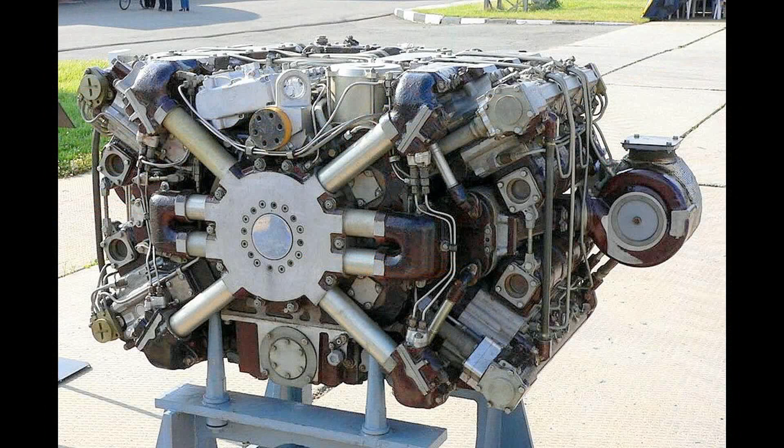It's obvious that the reason why the US Army wants an unmanned turret and an automatic loader now is only because the Russians are doing it and have upstaged the US Army in the press as a result. Yet nothing but the sound of crickets from the Army regarding the fact that the T-14 Armata is powered by a diesel X12 engine instead of a gas turbine. But I digress. The accidental implication of which is that the US government should adopt communism so that we can compete more effectively.

You may recall from another series of presentations I have created, Failed Tanks, that episode 35 featured a vehicle known as the Future Main Battle Tank, or FMBT for short. The FMBT was designed by Asher Sharoni and Leonard Bacon, whom you will remember from previous presentations, of the Western Design Corporation. It boasted an unmanned turret and automatic loader, and the US Army Armor School's official publication, Armor Magazine, featured concept art of the design on the cover of their July through August 1993 issue.

It goes without saying that the Army was clearly publicizing the FMBT as a feeler to gauge the reaction to the notion of a tank with an autoloader and unmanned turret, a concept they had been wringing their hands over for some time by then.

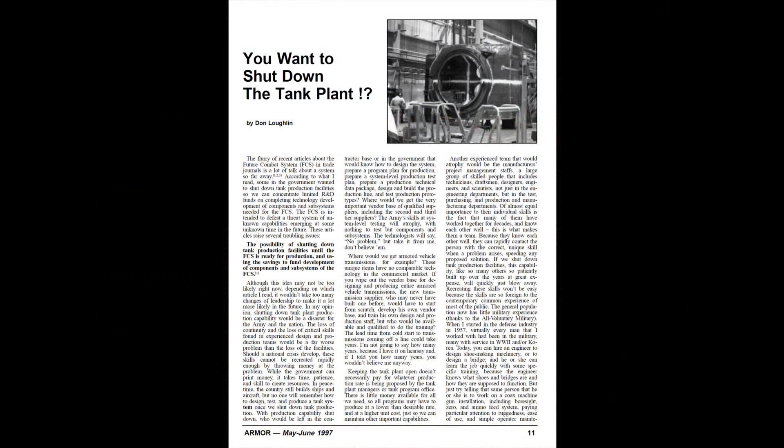That said, it was noted in the replies to Armor magazine's tank design contest results that due to the limited pivot of the autoloader and the low design of the FMBT, it had less gun elevation than most other Western tanks, and so little gun depression, that it was practically unusable on all but the flattest terrain.

Removing the crew from the turret inevitably bred the compulsion to remove armor from the turret, as the crew are no longer inside of it, making the structure on tanks that is most likely to be hit by enemy fire more vulnerable to penetration. Removing the crew from the turret also eliminated unrestricted top vision, as it was no longer possible for the TC to stand up through a cupola on the roof and survey the battlefield with his own eyes.

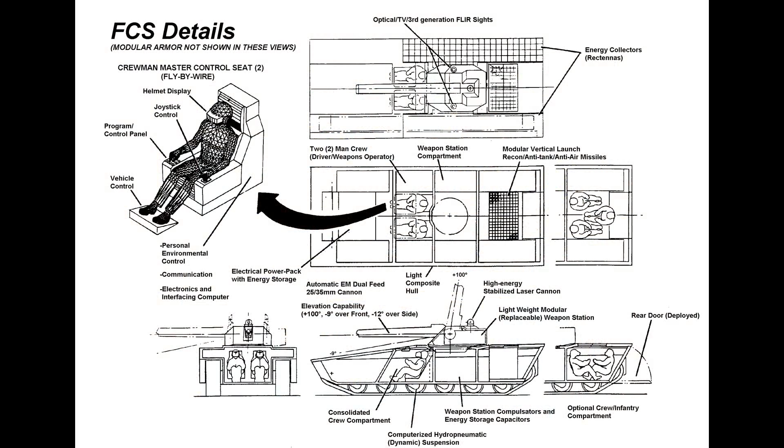The FMBT was instead to use a variety of sensor windows and camera arrays, which are vulnerable to being obscured by mud, dust, ash, and a wide range of other detritus typical of a battlefield. To say nothing of these cameras and sensors easily being damaged or destroyed by small arms fire, shell fragmentation, shrapnel, falling debris, and many similar hazards that can be expected to pepper tanks that are exchanging fire with the enemy.

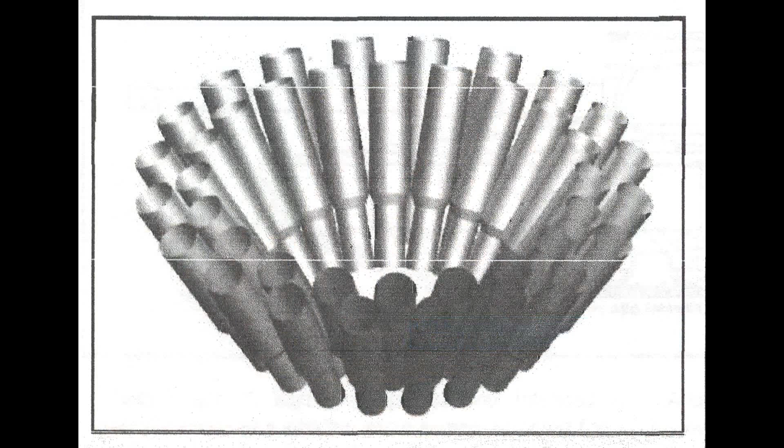The main gun ammunition was moved into a rotating carousel in the hull, in the same configuration as the Soviet-made T-72, which, as you may recall, exploded so violently when penetrated, as a direct consequence of this configuration, that their 25-ton turrets were yeeted 40 feet into the air. As the carousel also sat directly atop the belly plate, a shaped charge anti-tank mine could be expected to detonate the FMBT like a giant pipe bomb, and the same for a direct hit on the turret by a top attack munition.

Another fatal error of the FMBT's design was that, by removing the fighting compartment from the turret and its basket, the only place for the crew was sitting abreast in the front of the vehicle. Not only does this place the crew in the most likely part of the hull to be penetrated by casualty-type anti-tank mines, but a HEAT or sabot penetration through the side of the forward hull will bifurcate the entire crew.

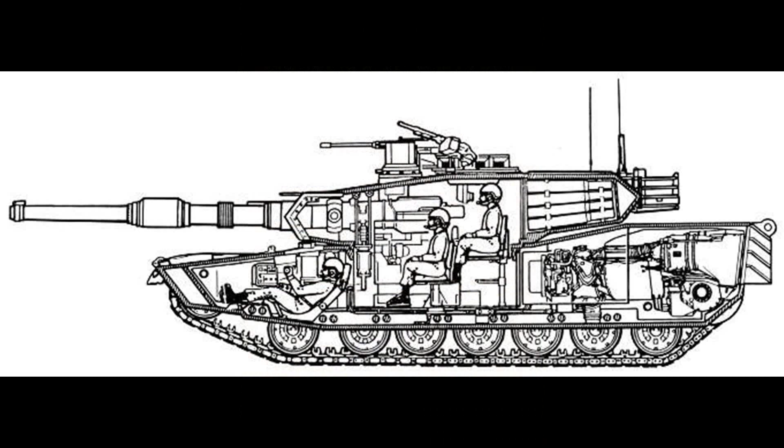As you can see in cutaway views of the M1, its turret basket alone is too cramped to accommodate the crew, and it goes without saying that personnel will not be expected to inhabit its blast furnace-like engine compartment. That makes it too obvious that an M1 with an unmanned turret will inevitably have 2 or 3 crew members sitting in the front of the hull, exactly where they would have been inside the FMBT. Also exactly where the crew are placed inside the T-14 Armata, which the Pentagon and their mouthpieces low-key worship, and are now portraying as a dire threat in an attempt to keep their budget fat and happy.

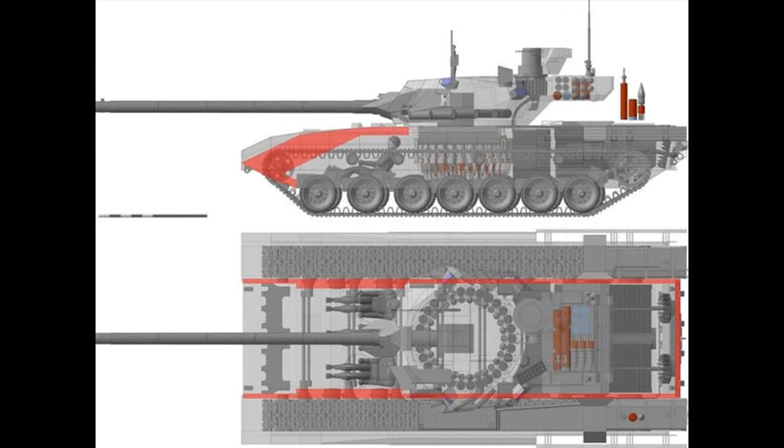Yet another issue that no one in the US defense industry or military seems to have the moral courage to address is the fact that with a crew buried deep into the front of the hull, the interior of the turret will only be accessible by exiting the vehicle. From there, a crewman exiting the vehicle must climb onto the roof and open a hatch, continuously exposed along the way to all of the threats that are the reason the M1 Abrams encases its crew in armor. If any of the weapons malfunction, a fire starts inside the turret that the suppression system can't handle, the machine gun must be reloaded with a new belt, or the autoloader or the replenisher breaks down, this is exactly what one of the crewmen must do.

It's either that, or return to base, and if the vehicle does so in the middle of a battle, it has thus suffered what military terminology refers to as a firepower kill.

The obvious solution to these problems is to remove the autoloader and replenisher middleman entirely, move everyone but the driver out of the driver's compartment and into the turret, thicken the turret armor, load the weapons manually, add a cupola to the roof to restore top vision, and get rid of all the cameras that the cupola has rendered

completely redundant. But then you'll just have a regular tank again, and the sales and ongoing technical support for a simple and reliable weapon aren't as profitable to the defense industry as a gold-plated Rube Goldberg machine that's always stuck in maintenance.

The selling point of the low-profile turret was in part that being unmanned helped keep the expeditionary tank's height low, but it ended up being significantly taller than the other 2 finalists. The 2 other finalists in question were the Cadillac Gage Commando Stingray and the FMC CCVL, which both had manned turrets.

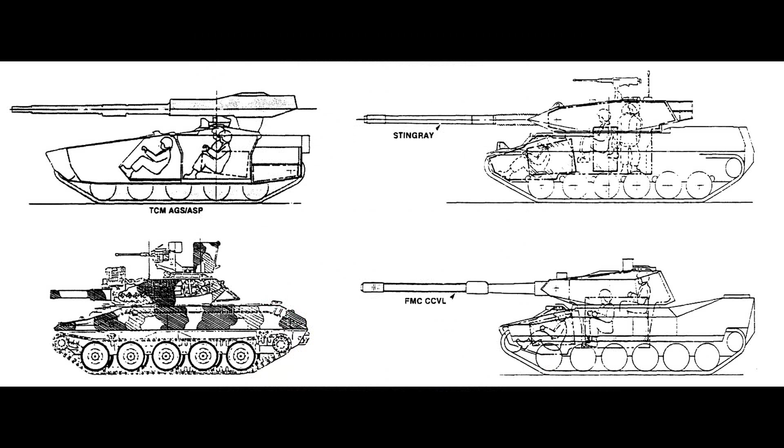The expeditionary tank also had a lot of trouble cycling ammunition and suffered frequent autoloader and replenisher malfunctions, an imbroglio which replayed itself all over again during the development of the Stryker MGS. Clearing these stoppages, of course, required someone to climb up atop the hull and then enter the turret from above, as the crew compartment far forward in the hull made it inaccessible from below. Why does that sound familiar?

This was not an issue with the CCVL, whose turret was manned. The autoloader and replenisher were both easily cycled manually by the crew simply by flipping open the top access cover. Crew injury while manually cycling the autoloader was effectively impossible, as simply opening the access cover also disconnected the mechanisms that operated it.

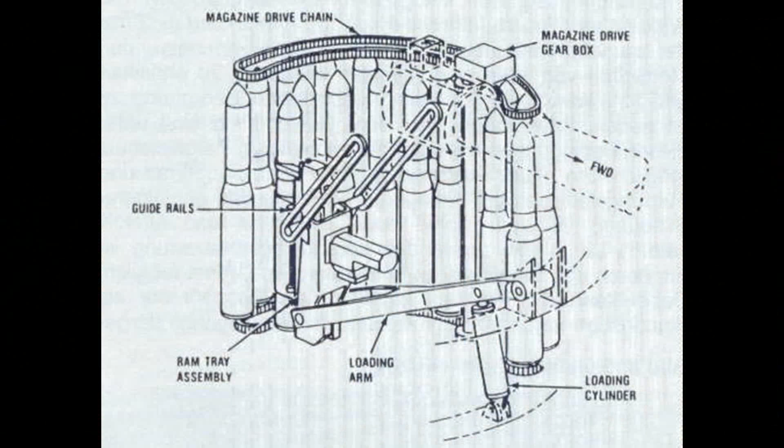Not that it was ever necessary, because the CCVL's autoloader was lifted right out of the proven 5-inch Mark 45 turret that had been used by the US Navy for decades by this time, and was so reliable that despite cycling thousands of rounds throughout development and testing, the CCVL's autoloader and replenisher never suffered a single malfunction. The Commando Stingray never suffered a single autoloader or replenisher malfunction either, because it never had them. Its manned turret included a human loader.

The excessive height of the expeditionary tank was the final straw for the Army, and it was the first of the 3 finalists to be eliminated, as a taller vehicle is a more dangerous payload to airdrop from a C-130 Hercules. The Commando Stingray was also only narrowly rejected by the US Army, but Thailand ended up buying 106 of them, which are still in service to this day.

The CCVL was declared the winner, and was type classified as the XM8, later as the M8 Buford. Meanwhile, despite a long and desperate marketing effort by Teledyne, they never sold any expeditionary tanks, and marketing for it ceased in the late 1990s.

The unmanned low-profile turret was later offered on a wide range of other vehicle hulls, including those from the M41, M60 Patton, Centurion, Challenger, and LAV-1, but not a single military in all the world was stupid enough to buy it. Not a single military, except the US Army, who bought it as a component of the M1128 Stryker mobile gun system. How quickly they unlearned their own recent history.

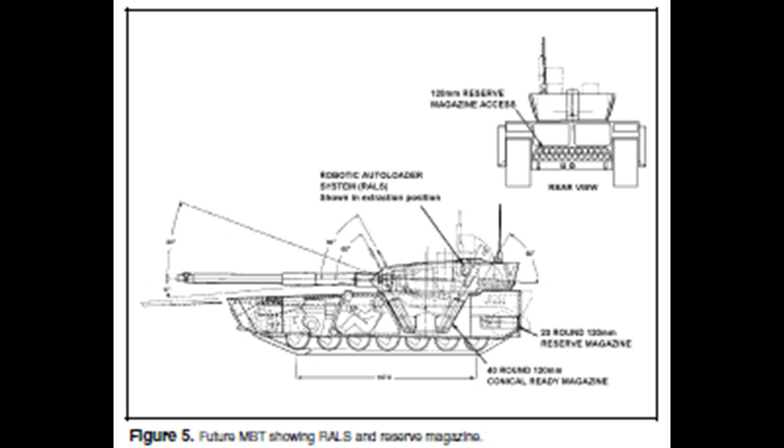A tank crew is a team and every man is essential to the success of a mission. Automation of the main gun will not reduce the workload of a tank crew or platoon. What an autoloader will do is take up precious space, require maintenance, and almost certainly reduce the number of troops available to accomplish the mission. Sharoney and Bacon state that the 3 versus 4 man crew is a doctrinal issue and should not be driven by engineering considerations. Having said that, they move right on to bend doctrine to fit an autoloader design. Here are some doctrinal issues from a line unit. 1. Keep it simple. 2. Tank crews cannot afford to be any smaller. There is too much soldiering to be done.

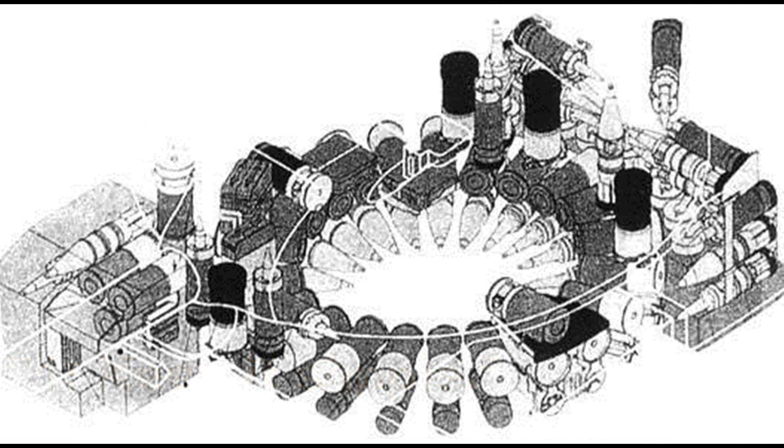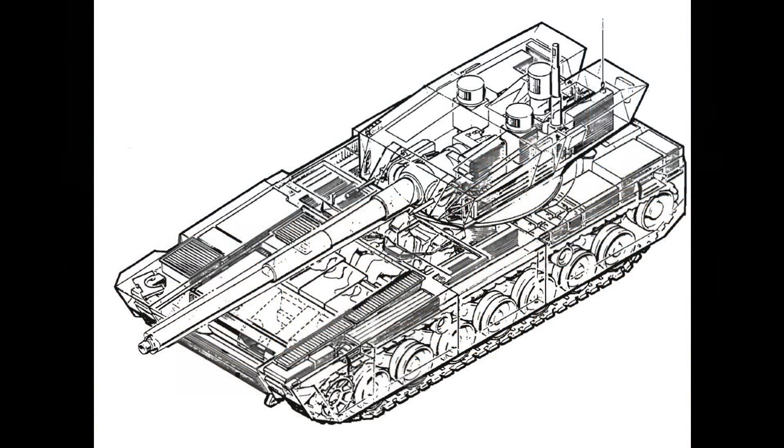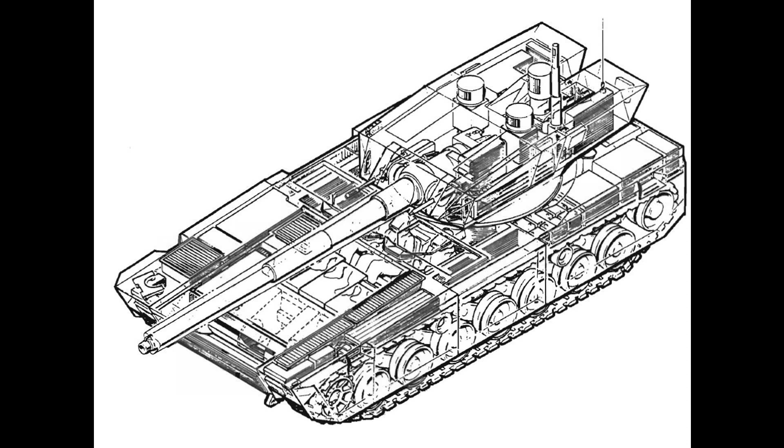3. Tank designs that sport unmanned turrets are no-go. The tanker's greatest asset is his commanding first-person view of the battlefield. The crew needs to be up in the turret, oriented with the weapons. Fighting a tank from the hull like a mole may increase survivability, but strips the crew of its natural situational awareness and ability to fight the tank. WDC decrees that automatic loading systems will become standard. Crew member duties will be readjusted to address other battlefield management and technological needs. Wow, sounds great. Perhaps they can explain how to readjust the tasks required to prepare a defensive position. I'll be all for an autoloader when it can replace the M8 chemical alarm.

In short, the Army has known for a long time that the changes they are now planning for the M1 Abrams are cursed. Given that the M1A3 changes far too much and weighs far too little, it is likely the final nail in the coffin for the development of the M1 Abrams. If that sounds far-fetched to you, then know that this outcome has become a trend in the US Army. Recall from the 2021 Bradley update that the Army themselves have publicly stated that the failure and termination of the A5 Bradley program prompted them to cease all further development on the Bradley fighting vehicle. However, the M1A3 isn't the only new tank program the US Army is currently pursuing. And no, I'm not talking about the Griffin 3, although I might have to address that topic in another presentation in the future.

Though before we jump into that, I'd like to note that there might be a lot of overlap between the first and second segments of this video, as they both involve numerous poor tank design decisions that are common to both topics. As such, many of the sources in the video description for this topic also apply to the next one. This is going to be another long one, so we'd better get started now.

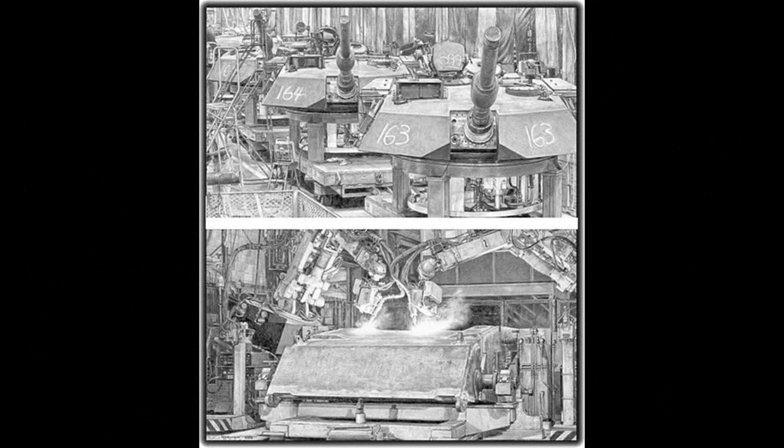The prerequisite talents, knowledge, and skills for developing a new armored fighting vehicle are perishable, and the Army hasn't developed a genuinely original main battle tank design for more than 40 years. If you look at the concept sketches that have been published by, or leaked from the Army, and by leaked, I mean planted, it's clear that they are just rehashing old ideas. And worse still, they're all only ideas that never worked, and self-evidently never will.

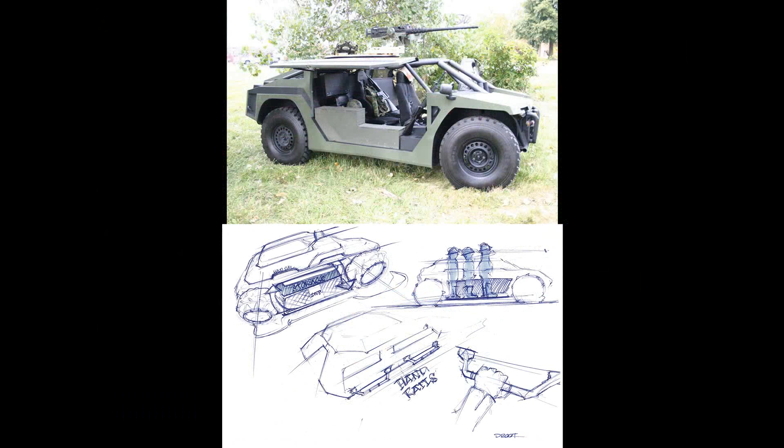How many committees did these sketches go through that failed to notice that their tanks of the future are all armored cars of the past? No new ideas. No future. This also isn't the first time the Army has succumbed to the siren song of wheeled armor, as the disastrous Kevlar coffin has shown us, and the idea of replacing tracked armor with trucks is presented unironically, as though it isn't a proposal to emulate Belgium. Canada nearly fell into the same trap as well in the early 2000s, which we've already seen.

The prospects for the M1 Abrams replacement effort are dark indeed, because the aforementioned issues not only prove it to be irreparably doomed by the simple fact that no one the Army involves themselves with either knows or cares what a tank is supposed to be, but more likely than not, they won't even be able to build it at all.

Colonel John Boyd once commented of several doomed US Air Force programs that they are out of airspeed, altitude, and ideas. Although the saying is a reference to aviation, it still otherwise perfectly fits the Army's latest crisis of competence. There is one certainty, however, given past US Army tank design trends: the next tank will be significantly heavier than

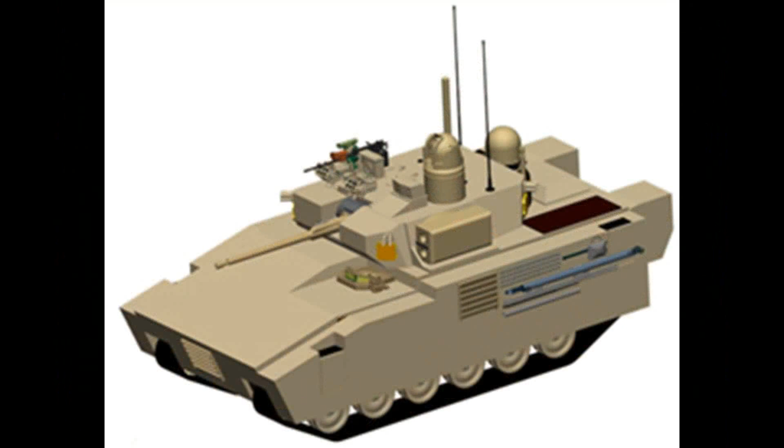Given that the last couple of M1 Abrams variants have grown in leaps and bounds to 85 tons, the latest variant of the originally 25-ton Bradley fighting vehicle now weighs 50 tons, and that the GCV intended until recently to replace the Bradley was to weigh 85 tons, it isn't much of a stretch to assume the replacement for the M1 Abrams will weigh at least 90 tons, if not more than 100 tons.

The Army will of course defend this indefensible decision, as they make preparations to field the spiritual successor to Germany's Maus tank. This of course sounds ridiculous, but would any of you have predicted 15 years ago that the Army would present to the world an 85-ton main battle tank with a straight face? This is what psychologists refer to as the ratchet effect, and when combined with incestuous amplification, the Dunning-Kruger syndrome, and placed inside of an echo chamber, the results tend to be tragicomic. Like, for example, the 85-ton main battle tank the Army is now fielding.

A related article on military.com titled "Army Studying Whether M1 Tank Replacement Should Be Driver Optional" reads like a cautionary tale of why you can't trust the system. For instance, let's just recite the title of that article once more. Army Studying Whether M1 Tank Replacement Should Be Driver Optional.

We already know better from the disastrous combat results of Russia's Uran-9 unmanned ground vehicle in Syria than to ever again rely on a computer to control and navigate an armored fighting vehicle. Yet more than a year after the uproar in the international press over that imbroglio, we still see the Army trying to crawl into that roach motel. This is only just the title of the article.

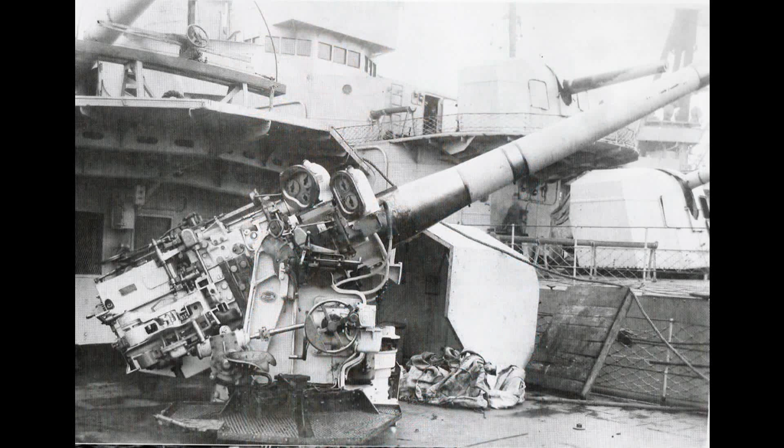120mm rounds are also much heavier than 105mm rounds as well, placing greater strain on both human and mechanical loaders, leading to more rapid fatigue for human loaders, and more rapid wear for autoloaders. 120mm ammunition is also already approaching the practical limit for what a human can seriously be expected to lift, as the French Navy learned the hard way with the 130mm and 138mm guns on their interwar era destroyers.

The Army's mad dash to regun the M1 Abrams with a 120mm gun also proved pointless, as the successful use of 105mm guns against T-72s in Lebanon during the 1980s, then Kuwait, Iraq, and Yemen in the 1990s has proven. In fact, after the 1982 Lebanon War, captured Israeli 105mm APFSDS ammunition was given to the Soviet Union for testing and evaluation, and gave the Russians some nasty surprises.

Dubbed the M111 Hetz, the Soviet army fired this APFSDS round from a captured Magach 4 main battle tank at the latest T-72B1 variant at the Kubinka Proving Grounds later in 1982, and they were horrified to discover that it went right through the strongest armor. The M111 Hetz was also grossly inferior in armor penetration to the US Army's 105mm M900 APFSDS round fielded in 1989. A fact the system rug swept to protect the continuing acquisition and use of the M256.

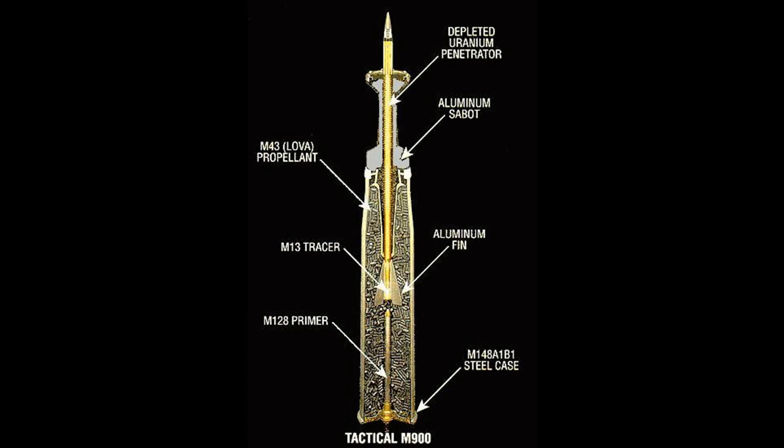Despite this, and despite tank armor evolution having effectively peaked in the early 1980s, the Army is still seriously entertaining the possibility of the M1 successor having a 140mm gun, a proposal akin to selecting a sledgehammer to swat a fly. Not only would a gun this large present crippling problems with ammunition handling, recoil, and a substantially greater muzzle blast danger zone for surrounding personnel when firing the gun, but it also means far less ammunition can be carried.

Ammo stowage would be reduced down to at most 30 rounds, and an extremely long ammunition compartment would be required, given that the shell casing alone for the 140mm round is a whopping 1 meter long, and the number of rounds a field supply train with a fixed storage volume can transport will be cut in half once more. That also means that the field supply trains already dangerously overworked with the maintenance and refueling of M1s will also have to bring them ammunition more often as well.

Carrying less ammunition than your enemies is a quick way to shoot yourself in the foot, as the Arabs learned the hard way. The following is noted on page 38 of the book M60 vs T-62, Cold War Combatants 1956 through 92 by Lon Nordeen and David Isby.

The amount of gun rounds inside the Patton M60A1, M60, M48, and the Centurion tanks is remarkably higher, about 60 rounds in each, than in the T-62 and T-55 tanks, less than 40 rounds. The meaning is that on average the T-62 and T-55 tanks should leave their active fight and firing positions for refilling of gun ammunition more often than the other tanks, which means that on average the percentage of effective tanks in each moment is smaller in T-62 and T-55 units than in the units of the other tank types.

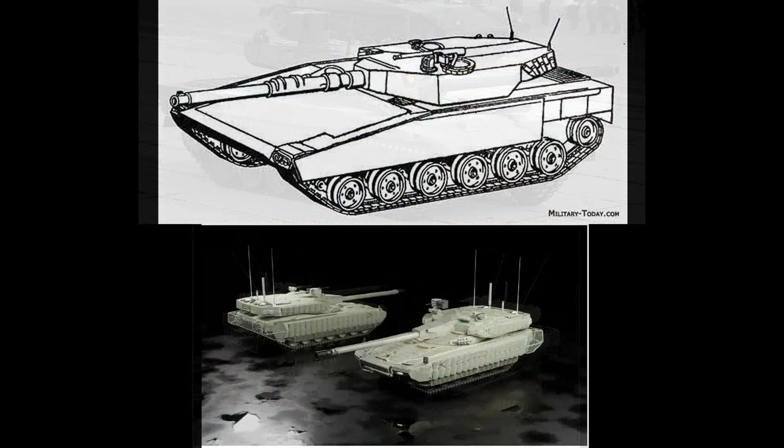The three finalists of the OMT program have also outed how much of an imagination wasteland the Army has become, as version 1 is a clone of the T-14 Armata, version 2 is an NKPZ suffering from a terminal case of gigantism, and version 3 is a Star Trek transporter beam accident that merged a Leclerc with a GCV. Moreover, the Army would much prefer you didn't know that all of these new ideas are not only old, but also thoroughly discredited by their own past publications.

For example, recall the FMBT described earlier in this video, and the armor community's backlash against it. Moreover, recall that the FMBT was designed by Asher Sharoni and Leonard Bacon of Western Design Howden, a company previously named the Western Design Company, or WDC. If you look up Western Design Company today on the internet, you will see that all they've ever manufactured were spare parts, which needless to say, is a huge red flag on the part of their resident celebrity tank designers.

That said, the remaining segments of this presentation are all basically random topics that I've never covered in detail before, but at the same time, aren't significant enough to warrant their own chapters of the real M1 Abrams. A few of these were originally destined for another fun M1 Abrams facts video which ultimately never went into production. Also, speaking of things that were never produced.

One of the most widespread disagreements between most publications on the M1 Abrams concerns the number that were produced, and it seems that, if you look at any three of them, all three will present a different number from one another. Wikipedia claims some 10,396 were built, while FAS, the Federation of American Scientists, claims some 8,800 were built. Tanks Encyclopedia claims 9,000 were built. Deagel, or however you're supposed to pronounce it, claims 10,646 were built, and I recall that at least one source claimed 12,000 were built.

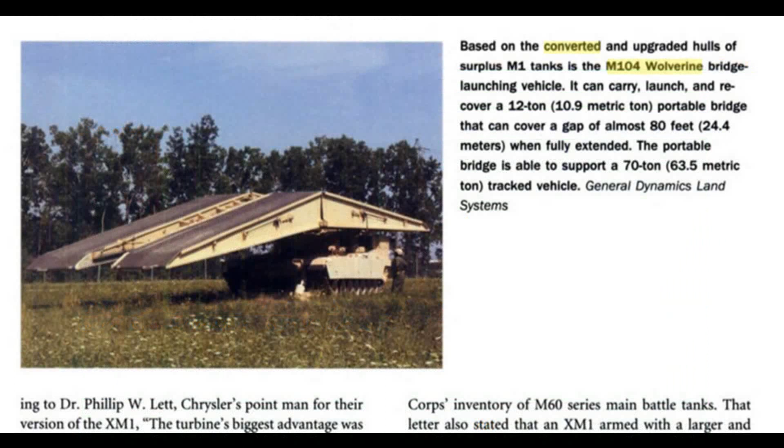If one reads the published documentation associated with these M1 variants, such as the M1A2 SEP, the M104 Wolverine, and the M1 ABV, it is noted that not a single one of these vehicles is a new built chassis. Rather, every single one of them was a rebuild of an existing older hull taken out of storage. That, of course, raises 2 obvious questions. What M1 hulls were all of the post-2000 M1 Abrams variants converted from, and how old are they?

It might seem pointless to count the number of M1 Abrams tanks in existence, but doing so brings to the surface an unpleasant fact about the M1 FOV that the Pentagon was hoping no one would notice. Namely, how old and badly worn out all of the supposedly new SEP series M1A2s are. As noted by Army Guide, the final M1A1 rolled off the assembly line in 1993, by which time M1A2 production had begun, and we have already established that all post-1990s M1 Abrams variants are rebuilds of older tanks.

In short, we can confirm that every single supposedly new tank delivered to the US military after the aforementioned 77 M1A2s were converted from vehicles built during or before 1993. That is, the fabulous new M1A2 SEP introduced in the early 2000s began their service lives at the ripe old age of 10 years old or more. But just how old? This is where the number of each previous M1 variant built, and when they were built, comes into play.

First, let's consider the M1A1, as it was the most numerous M1 version built, and because new built vehicles were produced for only two nations, the US and Egypt. According to the IISS publication titled Military Balance 2017, the Egyptian army owns 1,360 M1A1s, the last 360 of which were later imported from the US after year 2000. The Task and Purpose article we saw before noted that at the time it was written, there were 5,200 M1A1s in the US inventory, including some 3,000 that were in disuse.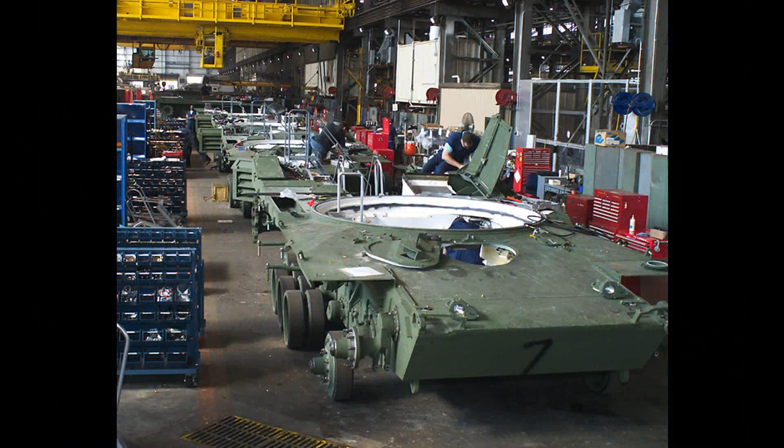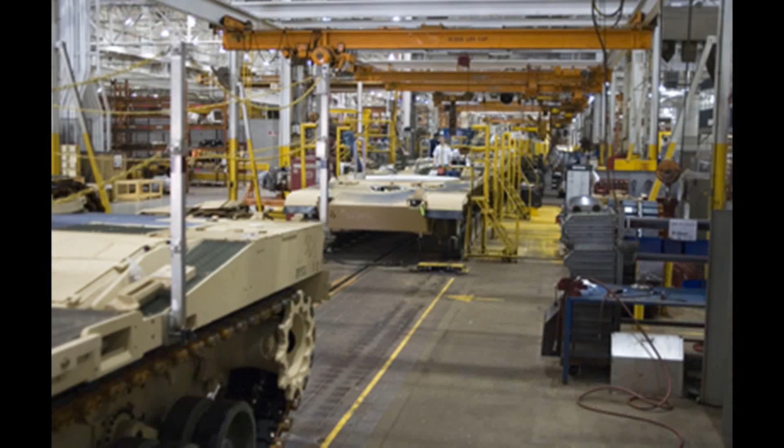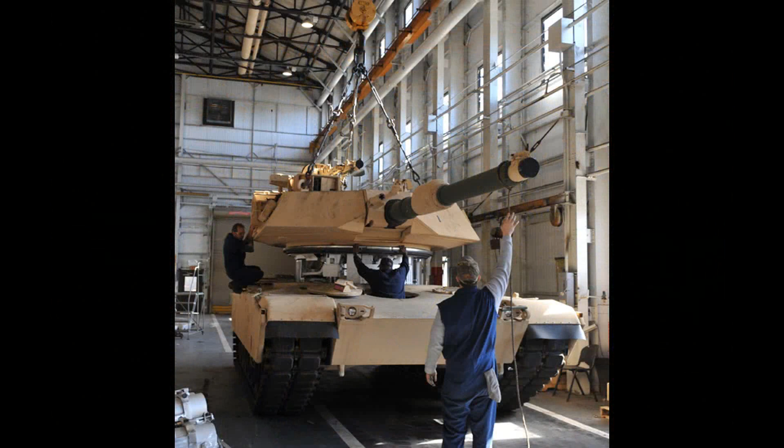Moreover, there's yet another dirty little secret concerning the production of the M1 Abrams. Not only did no new build production of the M1 Abrams FOV take place since the mid-1990s, but no new ones can ever be built either, even if the US government or GDLS wanted them. As noted in the 2021 update on the Bradley fighting vehicle, when production of war materials is finally terminated in the US, all factory equipment required to produce the complete weapon system in question is destroyed, in compliance with US law and international arms proliferation treaties. Only a fraction of the assembly line can legally be preserved, and then only for the purpose of refurbishing existing weapons, or producing certain specific parts for them.

The Detroit Arsenal tank plant in Warren, Michigan, that manufactured all of the M1 Abrams hulls was closed in 1996, and all manufacturing efforts were moved to the Lima Army tank plant located in Lima, Ohio. However, as noted by the press releases, the Lima Army tank plant was only outfitted to build spare parts for tanks, not new hulls or turrets.

That also puts into the proper perspective the hype in the early 2000s over the US Army supposedly not wanting any new tanks, GDLS supposedly still having the ability to build new M1A2s, and this supposedly being critical to the national interest. Given what we've previously established, this supposed crisis is obviously just the military-industrial congressional complex playing good cop bad cop as usual, to divert attention away from the fact that no more M1s can ever be built. Such are the extremes to which the system lies to us, in order to protect their precious nest eggs. They are so dishonest about how many M1s exist, and how old they are, that one has to pick through dozens of different publications to find the correct figures.

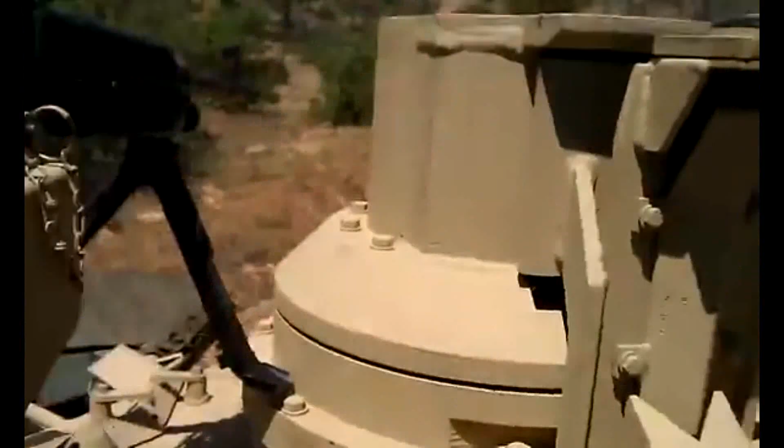However, it's not just the numbers they're hoping won't be noticed about the M1A2 SEP. It turns out there are some showstoppers involving the M1A2 SEP that somehow escaped my attention, which I discovered when browsing DOT&E's annual report from year 2000. For example, firing the M1A2 SEP's main gun while using thermal imaging causes a washout effect in the display for several seconds, during which the TC and gunner are blind. So much for the supposed speed of the M1A2's vaunted hunter-killer capability. The report claims the washout effect was finally fixed in year 2000. It's a good thing there wasn't a war between then and 1992, when the M1A2 first entered service.

Another issue is that the UAPU, the much advertised Under Armor auxiliary power unit of the M1A2 SEP, didn't work, and as such, it was never installed. Instead of a lengthy elaboration, I'll just read to you what DOT&E reported on the matter in their own words.

The development of the Under Armor Auxiliary Power Unit, UAPU, has proven to be a significant program challenge.

The UAPU is intended to provide auxiliary electrical and hydraulic power to the system during the conduct of mounted surveillance, thus reducing engine usage during tactical operations while improving operational fuel consumption rates. Engineering design problems encountered during developmental testing with the UAPU have led the program to delete the UAPU from the M1A2 SEP production configuration. The UAPU remains an important system requirement, however the program is not currently funded to continue UAPU development and the UAPU is not currently included in the production configuration of the system.

You will recall from earlier that ultimately, the UAPU ended up replacing one of the 4 fuel cells in the M1A2 SEP, only to be removed later. Yet the removed fuel cells were never reinstalled, and were instead replaced by an over-glorified car battery.

Another example of how badly the Army botched the M1A2's development is that it inexplicably acquired a problem with uncommanded gun movements that no prior M1s had an issue with. Somehow previously overlooking this astonishing failure, I had to shoehorn in this topic at the last minute while creating this video because it's too damn funny to leave on the cutting room floor. The M1A2's tendency to suddenly move its gun without warning plagued it for years, setting back its service entry for half a decade. I'll just let the DOT&E document's own text speak for itself.

As opposed to today's standard of journalism, which is simply to copy-paste statements made by the Pentagon or the defense industry. It was within this era that a watchdog group called the Project on Military Procurement reported both heavily and honestly on the M1 Abrams, much to the frustration of the Pentagon. The Project on Military Procurement later merged with several other watchdog organizations concerned with government accountability to form the organization since known as the Project on Government Oversight, or POGO. The relevance of that history is that one of POGO's first reports on Pentagon misconduct was a groundbreaking 1990 article on the M1 Abrams, titled, "The Army's M1 Tank, Has It Lived Up to Expectations?"

This article is not only one of my primary sources on much of what went wrong with the M1 Abrams program, but it really stuck in the Army's craw because its sources were almost entirely Pentagon, government, and defense industry publications. In other words, it wasn't POGO's word against the Army's word, but the Army's word against the Army's word. For example, one of the most important, and yet most overlooked, paragraphs in this 1990 article was a quote from a US Army document titled FM-100-5 Operations.

FM-100-5 isn't just any US Army publication. At that time, it was effectively the constitution of US Army policy during wartime, as it set the agenda from which all other Army warfighting policy stems. Along with an accompanying document, titled FM-100-1, The Army, this and FM-100-5 are considered the capstones of all Army manuals. The first edition of FM-100-5 was published in October 1939, and it went through more than a dozen iterations before it was superseded in 2001 by FM-3-0 Operations, but the edition introduced in May of 1986, which was current at the time POGO quoted it, was one of the most important of all of these documents, as this one introduced the doctrine of AirLand Battle.

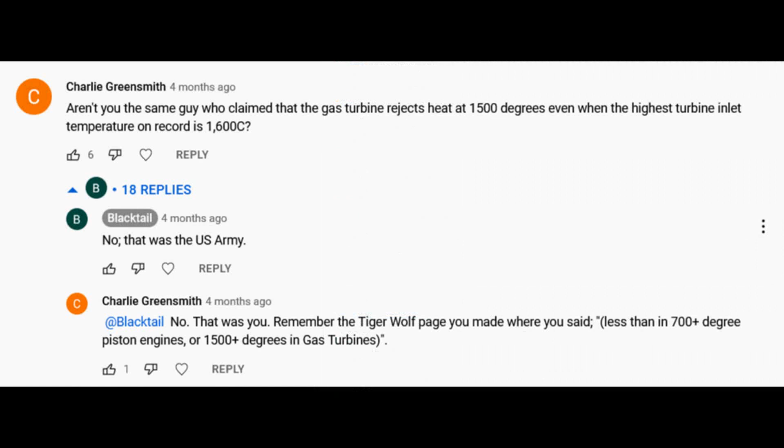This reveals 2 failures of forethought on the part of wherever this argument came from. First, the exhaust from the AGT 1500 is 1700 degrees Fahrenheit, while the highest turbine inlet temperature was 1600 degrees Celsius. In other words, the MHI turbine had an inlet temperature of 2912 degrees Fahrenheit. The most astonishing failure of the detractors' arguments is that they cited the inlet temperature, given that it's obvious that the hottest temperatures from a gas turbine are from their exhaust manifolds, and not the air inlet on the beginning of the combustion cycle, which is at the opposite end of the engine.

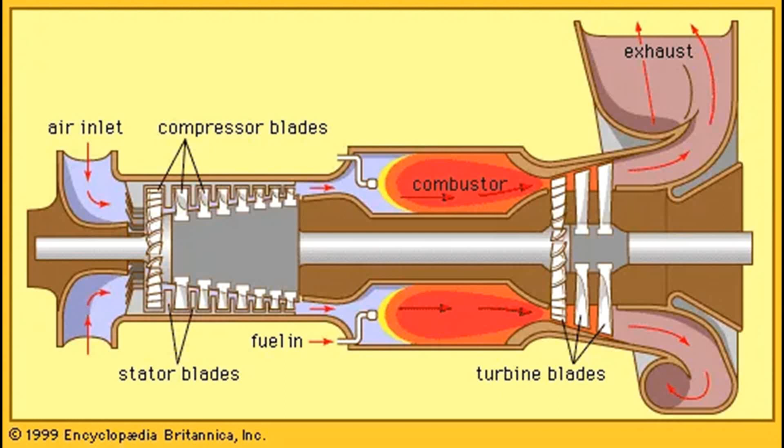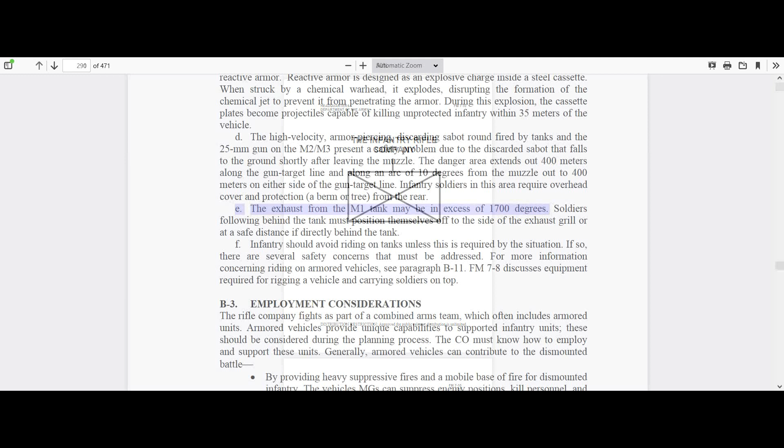Most hilarious, however, is that none of them would admit they were wrong, no matter how many authoritative sources I cited. The detractors' narrative is in conflict with the US Army's own documentation, as the 1992 edition of Field Manual FM 7-10, the Infantry Rifle Company, noted that the temperature of the exhaust from the M1 Abrams is in excess of 1700 degrees Fahrenheit, and warns personnel against following closely lest they suffer serious burns. That this entire segment was still included in the 2000 edition of FM 7-10 gives further credence to the M1's exhaust being 1700 degrees Fahrenheit, especially given that this statement remained uncorrected for more than 15 years.

However, subsequent US Army field manuals have had this mission critical information dummied out of them. For example, the 2006 edition of FM 7-10 put a gag on the temperature of the exhaust, and it now states the following. M1 series tanks have an extremely hot exhaust plume that exits from the rear of the tank and angles downward. This exhaust is hot enough to burn skin and clothing. No mention was made of just how hot the exhaust was, and the exhaust deflectors referenced in the 2006 edition had been standard equipment in all M1s since before the 1992 edition of FM 7-10. The FM 7-10 manual was superseded in 2017 by ATP 3-21.20, which not only fails to mention the M1's exhaust temperature, but also never even mentions the M1 Abrams at all.

You heard that correctly. The Army's primary field manual for infantry operations makes no mention of the Army's primary weapons system, which consumes more of their maintenance budget annually than all other systems combined. As of summer 2022, the 2017 edition of ATP 3-21.20 is still current.

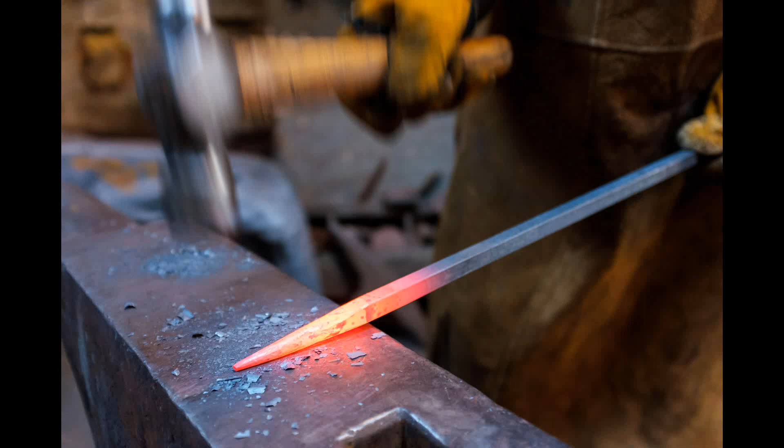It is also explicitly stated by Forecast International's 2008 report on the AGT 1500 that its turbine inlet temperature is approximately 2180 degrees Fahrenheit. Needless to say, if that's how hot the temperature at the beginning of the combustion cycle is, the AGT 1500's exhaust is quite a scorcher. To put the M1's 1700 degrees Fahrenheit exhaust into context, an iron poker heated to the point that it glows red hot only reaches a temperature of 900 degrees Fahrenheit, and I will have you know that I have personally been seriously burned on several occasions by metal that didn't even approach that temperature.

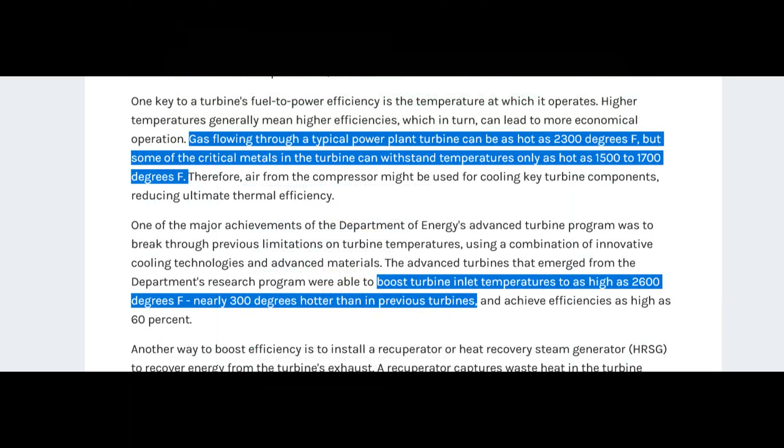Gas turbines aren't getting any cooler either. The US Department of Energy webpage on gas turbine technology states that a typical gas turbine's inlet temperature is up to 2300 degrees Fahrenheit, while newer examples are documented to exceed 2600 degrees Fahrenheit. Meanwhile, diesel tank engines never produce exhaust even approaching 1700 degrees Fahrenheit.

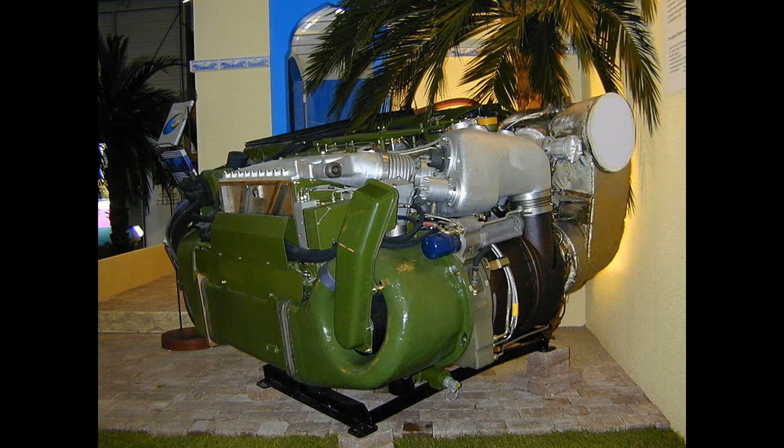For example, John Pike's GlobalSecurity website notes that the V8X1500 diesel V8 engine used in the Leclerc main battle tank has the same 1500 horsepower output as the M1's AGT1500, but also an exhaust temperature that never exceeds 400 degrees Fahrenheit. A gas turbine engine was at one time offered for the Leclerc, but it was turned down by the French army, undoubtedly due to their reluctance to force infantry taking cover behind their tanks to take a giant shrieking blowtorch to the face. Needless to say, this proves which side of the debate all the hot air is really coming from. However, a proper solution was in fact offered to the US Army.

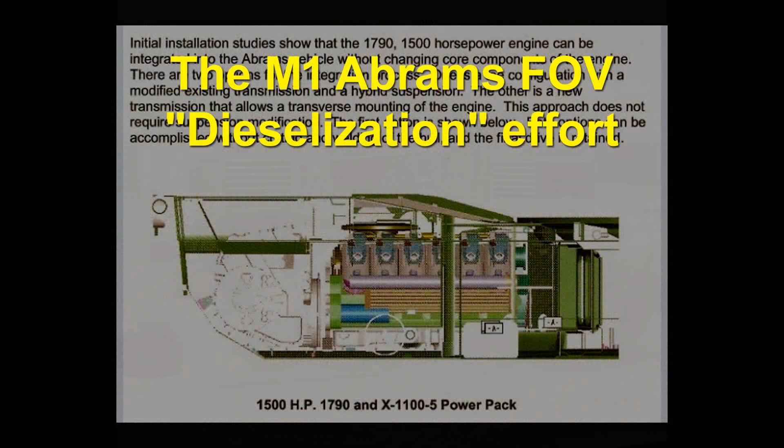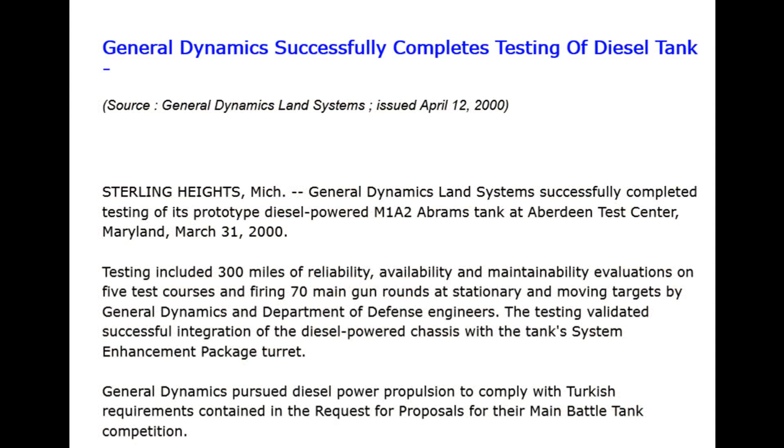One story regarding the M1 Abrams tank's development which has received relatively little attention from the press is an ongoing effort by the manufacturer to re-engine the M1. General Dynamics Land Systems has been pressing since at least the 1990s to standardize a diesel engine for the M1, and they even bought a license to build one in the same power class as the Honeywell AGT1500 gas turbine. The GD883 engine is a US-made copy of the German MTU 883 KA501 engine that powers the Leopard 2 tank, and GDLS originally got the license to produce this engine for use in Israel's Merkava Mark IV tank.

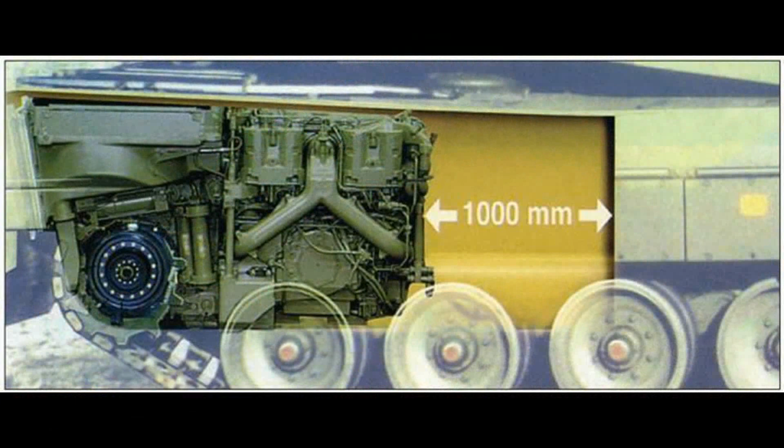The MTU 883 was already proven in the M1 Abrams way back in the 1980s, but in April of 2000, GDLS showcased an M1A2 powered by the GD883 on the Aberdeen Proving Grounds. The GD883 powered M1A2 demonstrated performance and mobility indistinguishable from the standard turbine-powered M1A2, save that it had an even longer range despite carrying half as much fuel. The US Army's reaction was essentially a yawn, and it was back to business as usual, despite only 12,000 AGT1500s ever being built for 10,500 M1s.

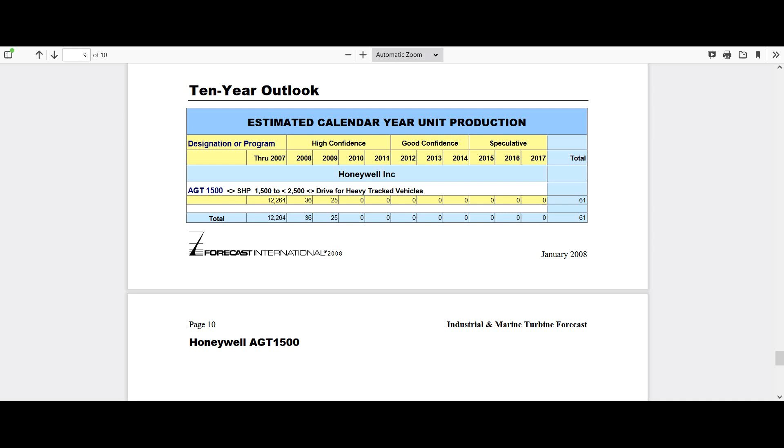Unsurprisingly, it wasn't even 8 years before those chickens came home to roost. Recall the revelations from the April 12, 2007 article "The Train Wreck Is Here Now" from part 1 of the 2022 M1 Abrams update. However, General Dynamics hasn't given up on the GD883 sales pitch. In 2013, Defense Media Network published an article titled "Abrams Dieselization Project, a Modest Proposal," which outlines the current effort. Like this very presentation you're watching right now, that article was split into two parts.

The first of these mostly outlines the situation and uses excessive corporate doublespeak to pad for space, but it also mentions near the end of part 1 that compared to earlier iterations of the MTU-883, the GD883 runs significantly quieter and cleaner. However, the juicy details are in part 2 of this article. For instance, an Abrams Brigade Combat Team, or ABCT, contains 60 M1A2s or M1A1s, 60 Bradley fighting vehicles, and 112 M113 Gavin APCs, which costs a startling $66,735 just to move a single mile.

However, merely switching from a turbine to a diesel reduces this cost from $66,735 to $57,636, a 14% reduction. A logistics package, or log pack, is required to replenish an ABCT every 12 hours, and a standard log pack for an ABCT includes 126 fuel trucks, 15 M969A1 5,000 gallon fuel tankers, and 48 M978 2,500 gallon fuel tankers, allowing for a range of only 205 miles for gas turbine powered M1s. According to the projections of General Dynamics, that fuel consumption is reduced by a whopping 50% with the GD883.